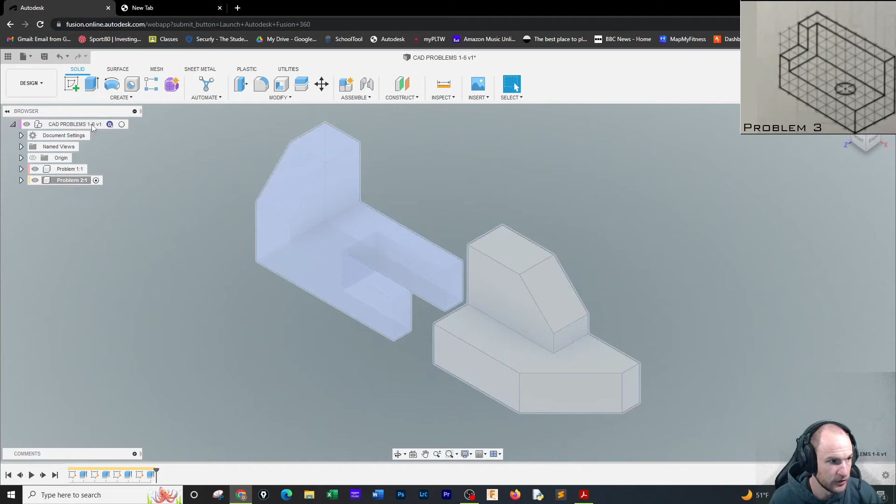Alrighty then, we're on number 3. Moving right along. So we're going to right click on this. We're going to go new component. We're going to say problem 3. Alright, and I'm going to start by making a sketch on the front face. I'm going to slide it over.

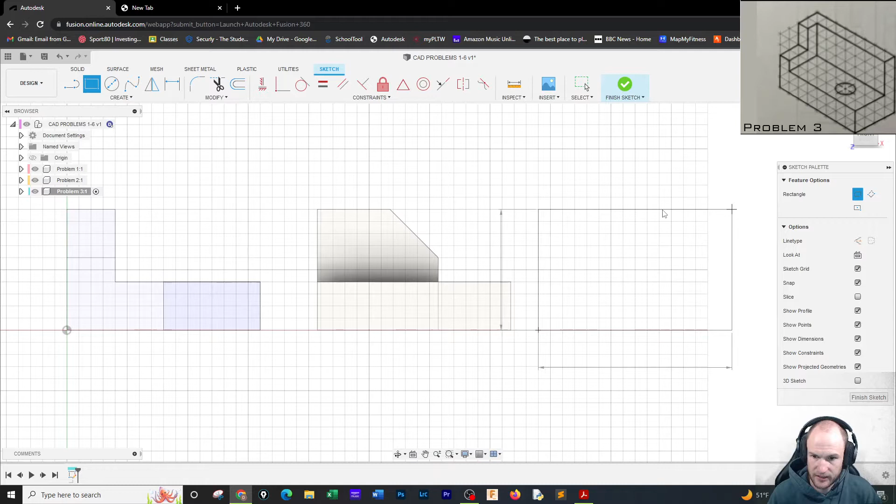And problem 3 is a 1, 2, 3, 4, 5, 6, 7, 8. It is an 8 by 5 again. Once again, I think I'm seeing a pattern. So 5 tall, hit tab, 8, so 5 by 8. This one I don't need to do anything fancy to get rid of stuff yet. I will eventually, but not yet. So I'm going to do that.

It is 4 deep, so I'm going to extrude back -4. So -4 back, staying with the pattern from the other ones. And I got to do some stuff now.

Okay, so I can attack this a couple ways. There's an area I can cut out from here or here. There's an area I can cut out from here, and then I'll make the hole last. So I'm going to go with the biggest one next. And I think I'm going to do it from the side just because I feel like it. So I got a sketch and I clicked on the side.

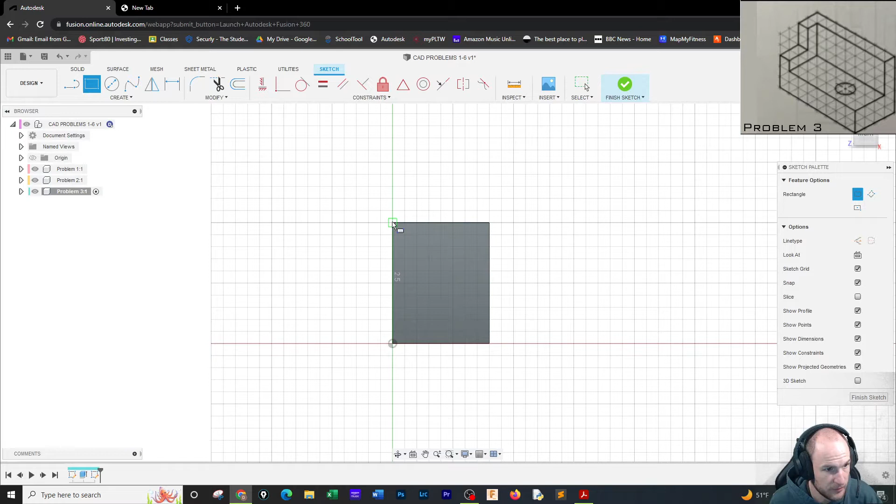And I'm going to make a box here. And this box, if I'm counting, is 1, 2, 3 by 1, 2, 3. So it is a square, a 3 by 3 square that is in the top corner. So I got a 3 by 3 square there. Going to hit finish sketch. And I'm going to extrude this square in. So it's a cut, not out, going in.

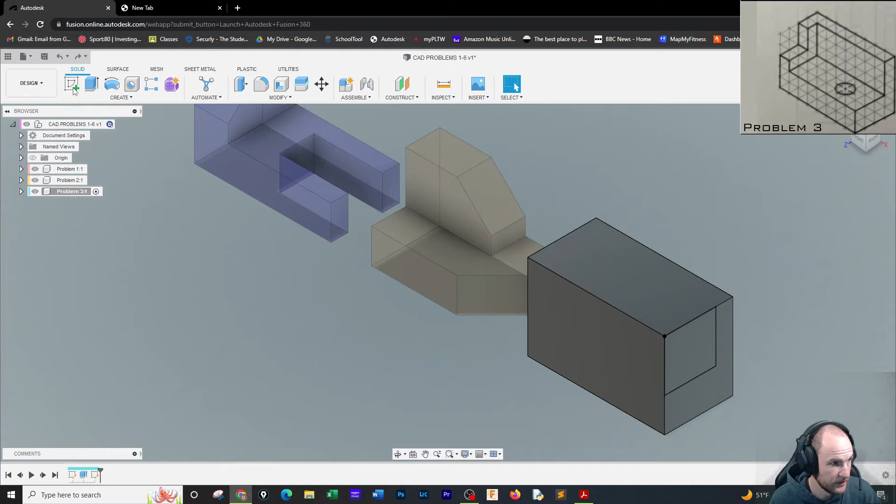Oh dear. One nice thing is I can always go back a step with Control Z. There we go. I clicked it. All right. So just this one face, not both of them. And I'm going back 7. So we're going back -7. See how it gets a cut. It's giving us a preview of the cut. This looks good.

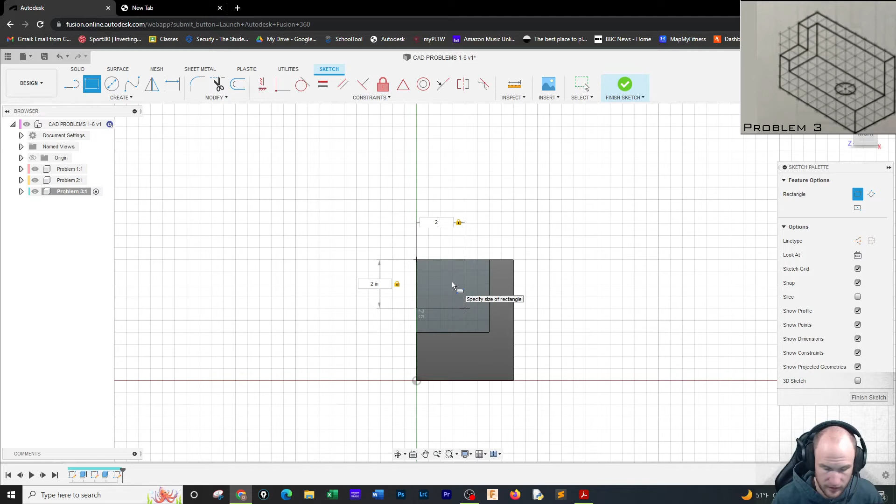All right. Now that I've gone back 7, I got to make another cut right here. And same kind of procedure. This time it's going to be a 2 by 2 square in the corner. It's 2 by 2. Leave it up for a second so you can see. So we got a 2 by 2. Hit finish sketch. And I'm just going to cut back 1. So you're cutting back -1. And there we go. And the last thing I can do is I've got to make a hole right here.

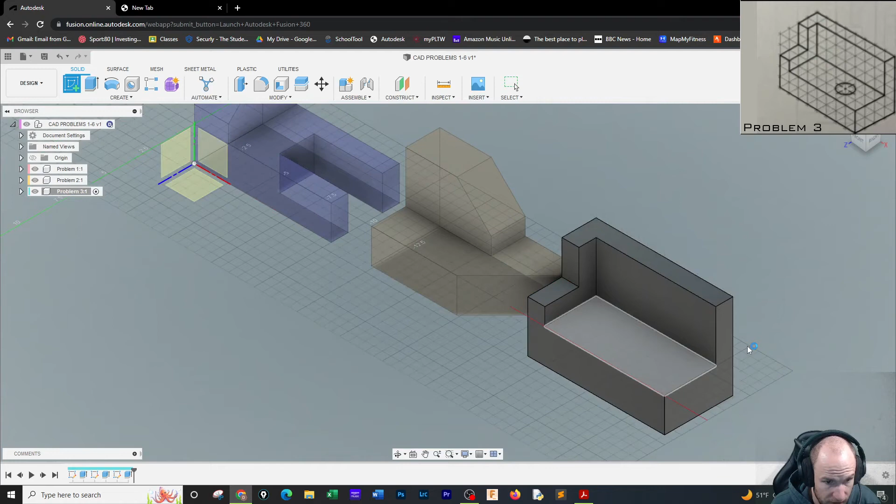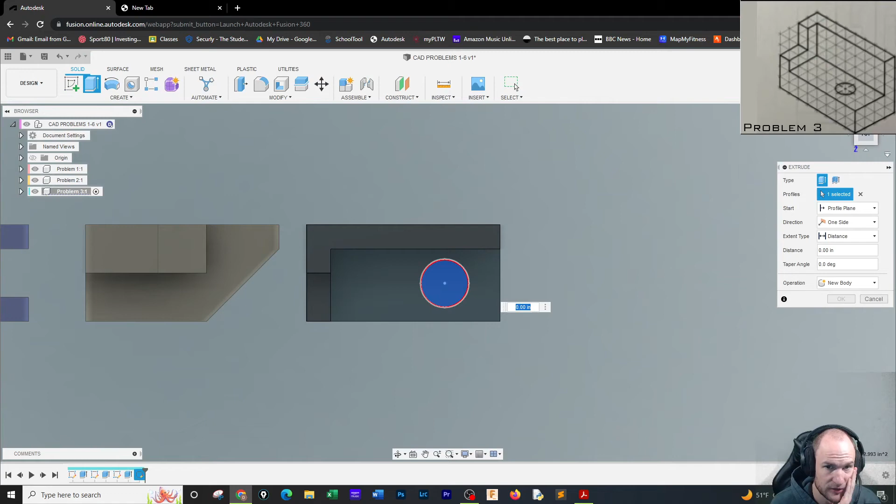I'm going to spin the top. So let me get rid of that picture quick. 1, 2, buckle my shoe. All right, so for this, I got to place the hole, and I got 2 ways to go about it. I can do a circle, and I can hit finish sketch, and I can extrude cut the circle. So I can do it like this, and that's nice and simple, and there's nothing wrong with that. But I do not want to do it that way. You are more than welcome to.

I would prefer to do it with the point tool, because that is the proper way to drill holes. So I'm going to go to point. I'm going to put a point in there, and then I have to dimension it accordingly. So this hole is tricky because it's kind of in the middle of 2 different things. So it looks like it goes in 2.5 and then up 1.5. So from here to here, it appears to be 1.5. And from here to here, it appears to be 2.5.

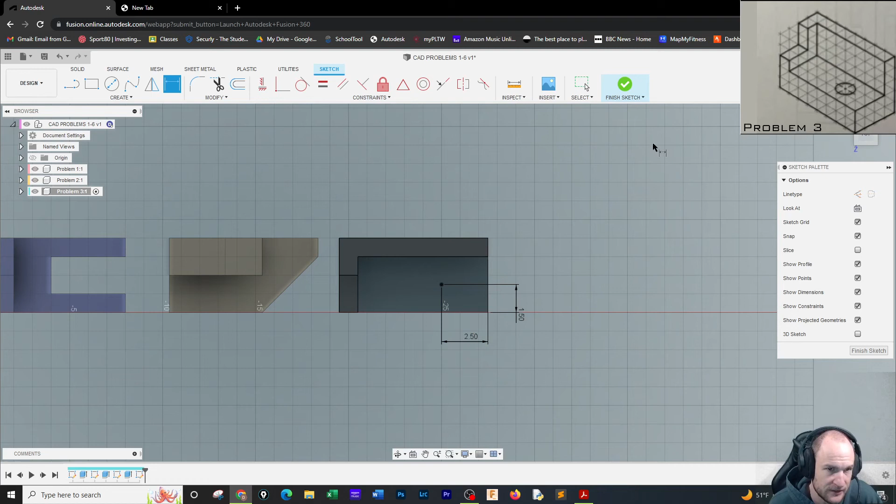Okay. And then the hole's diameter, it's slightly bigger than a box, but not quite 2. We're going to go with this is about 1.25 inches. It's not like a set size. There's a little bit of wiggle room in here. So I'm going to say 1.25 inches. If you'd gone 1.5 inches, I'd probably accept it, but I don't think it's quite there. So we're going to say 1.25 inches. So we're going to finish sketch.

And we're going to go to the hole tool. And I'm going to click on this. And it gives me lots of options. And this is just to kind of show you there's simple counterbores, countersinks. This is just a simple hole. It is a through hole, so it's going through all the way. And like I said, we're going to say it is 1.25, an inch and a quarter. And I think that looks good. I'm going to say okay.

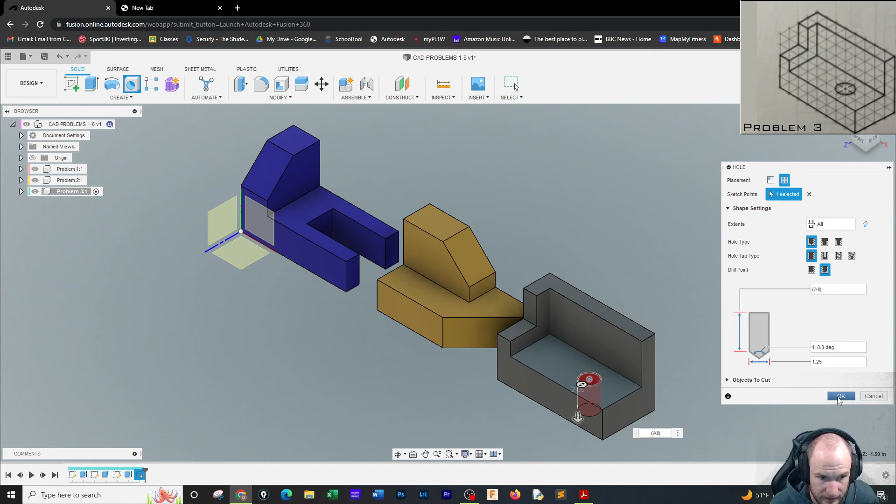And it will drill that hole an inch and a quarter. And I'd say that looks pretty spot on to what the drawing had. So I'm pretty pleased with this. I'm going to slap a color on it. Appearance, red. Okie dokie. That is number 3.